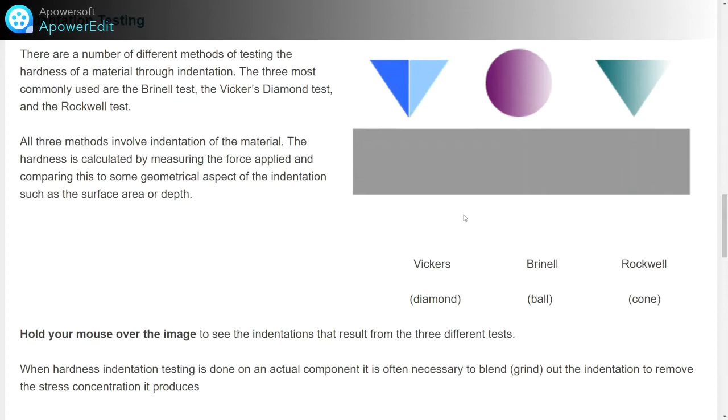Poldi hardness testing. So we'll see the Poldi hardness testing equipment. The aim of this Poldi hardness testing is to check the Brinell hardness number. So this is the body of the Poldi hardness tester, and it has this ball indenter with a 10 mm diameter. So we'll keep this here.

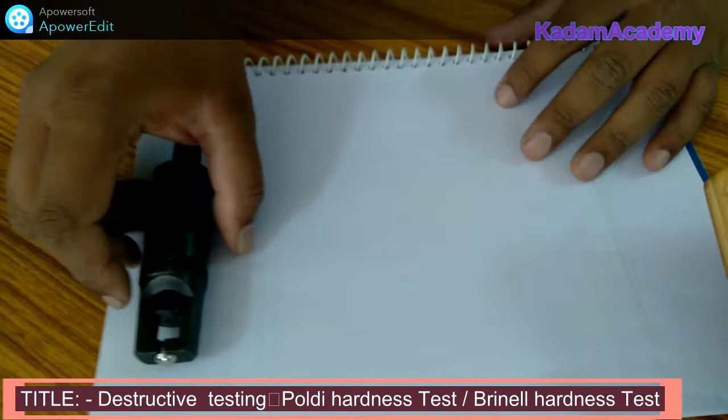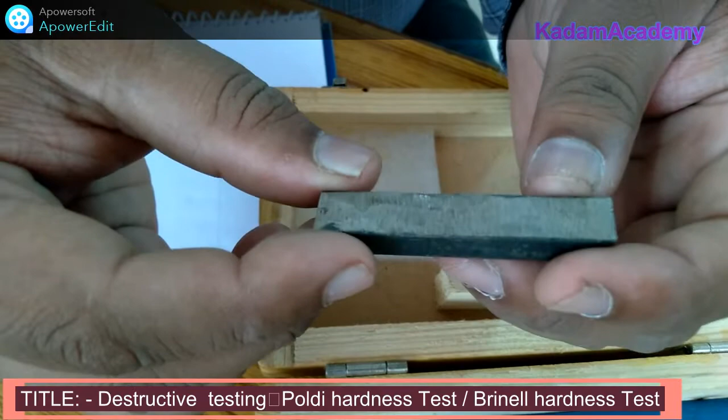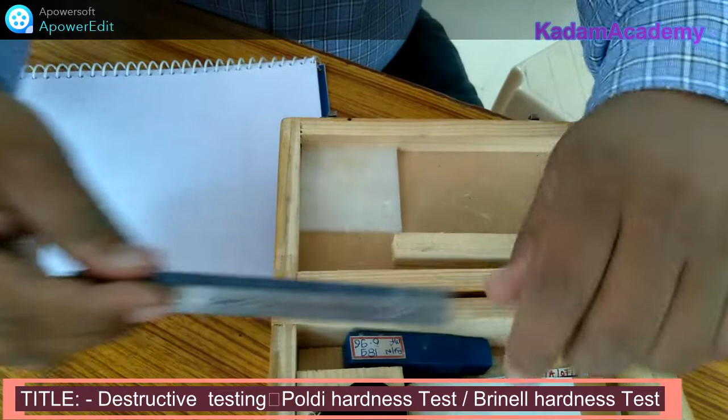Then we are going to check the Poldi hardness on this mild steel specimen. By using this Poldi hardness tester we are going to check the Brinell hardness number. So this is the mild steel specimen. Next, a standard bar of known hardness is required. Its hardness is about 189 BHN. So we know the hardness of the standard bar, and we are going to check the hardness of this mild steel specimen.

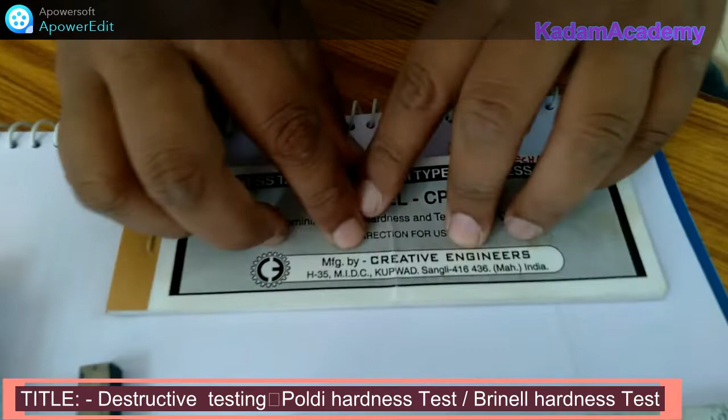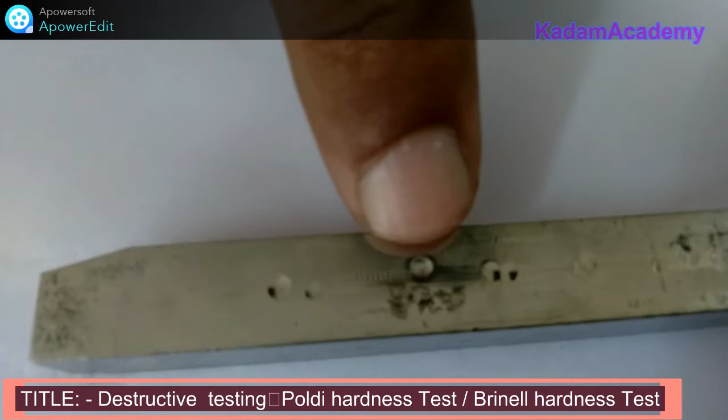Next, the chart is provided to you to check the diameters. You can observe here the earlier indentations on the standard bar. You can measure the diameter of these earlier indentations using this eyepiece. So you can put the eyepiece and measure this indentation here.

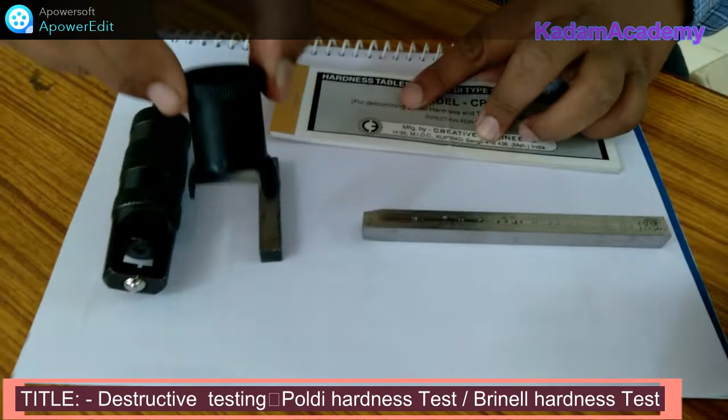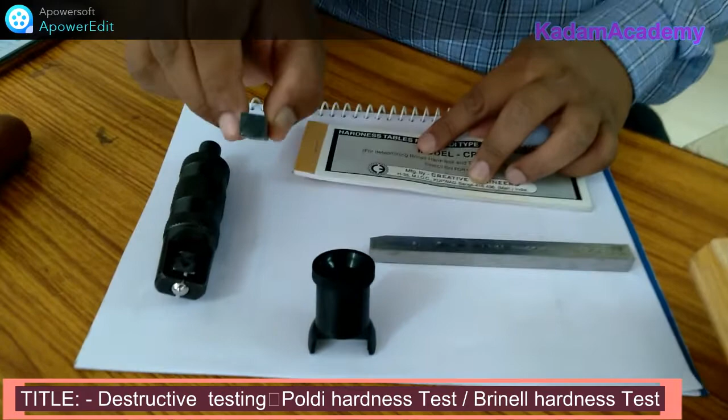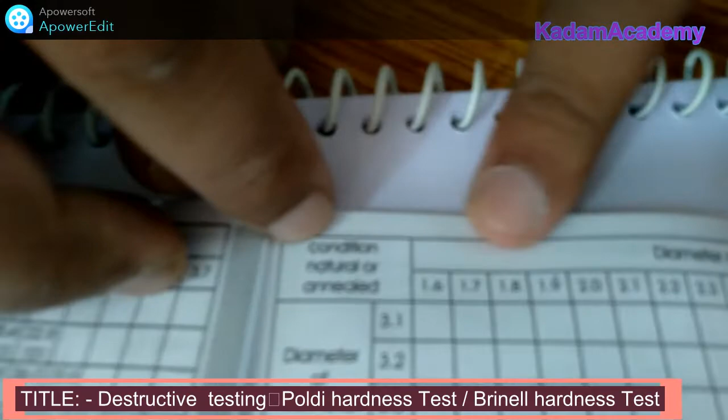Similarly, you measure the indentation by putting this eyepiece on the specimen, and after that you will have two different readings, one diameter reading of this mild steel specimen and one diameter reading of this standard bar. And you can observe in the chart that one diameter is on the X side and one diameter is on the Y side. So from that you can easily pick the values of BHN.

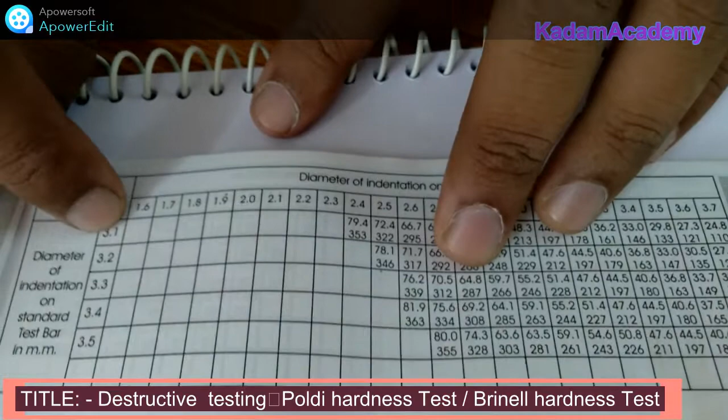The principle of working of this Poldi hardness test is similar to that of Brinell hardness testing. We'll make the impressions on this mild steel specimen as well as on this standard bar. So let us put this standard bar inside this section. So in this section we are putting the standard bar. So we have adjusted the standard bar here.

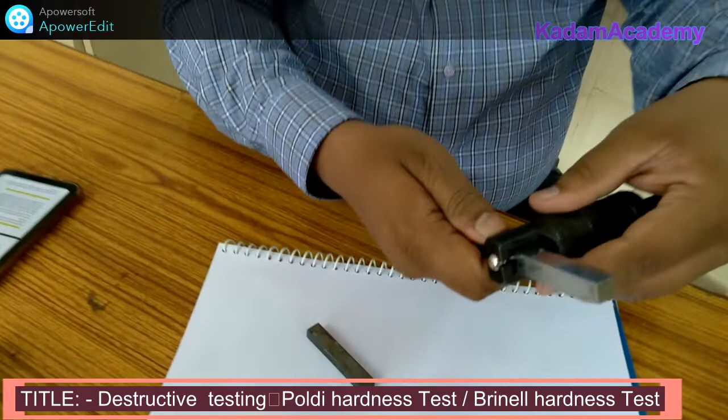We'll keep this arrangement in the left hand and put this specimen here, and then we'll put this left hand arrangement onto this specimen, and by using this hammer we'll make a blow on the top of this plunger, so that two diameter impressions will be made. One impression will be made on this standard bar and one impression will be made on this specimen. So let us take the reading.

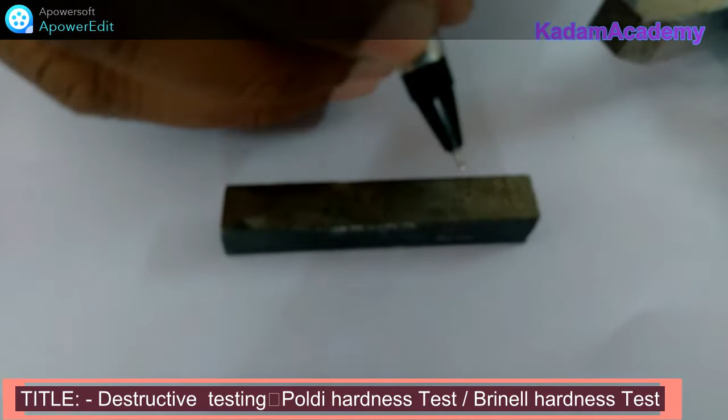So I am putting this arrangement onto this specimen, holding it like this in the left hand, and by using the hammer, let us strike the top of the plunger to make the impressions. Now you can see the impression is made here on this specimen. So you can observe the impression here. Inside this circle I marked, there is an impression.

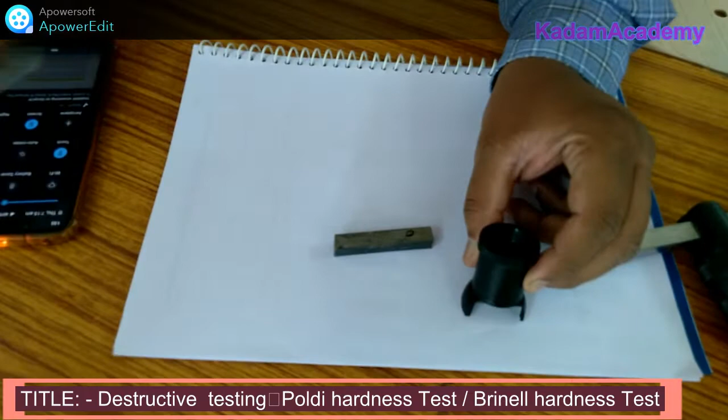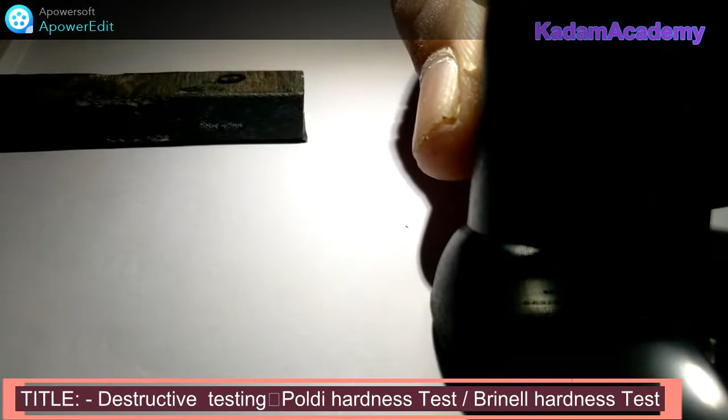Now by using this eyepiece, we'll check its diameter. So we'll measure the impression on this specimen. First we'll see the details of this eyepiece. This eyepiece has a scale here. Its least count is 0.1 mm. So you can see the scale now. It has 0 to 10, and each division counts 0.1 mm.

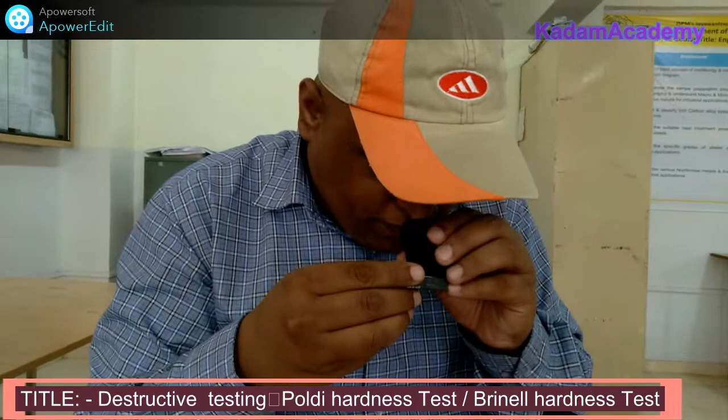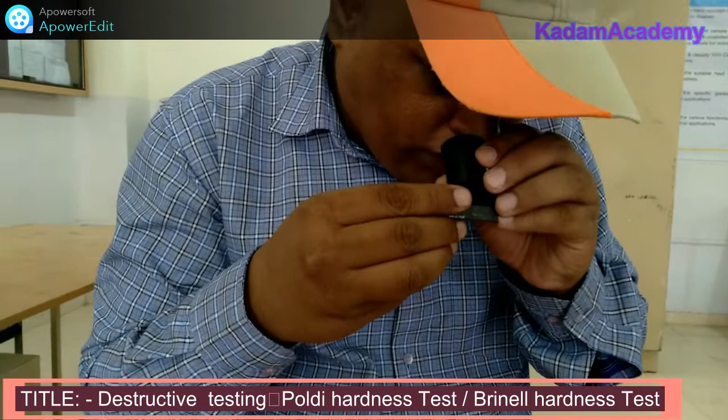Now I am taking the reading of this impression on the specimen by using the eyepiece. We will keep this eyepiece here and adjust the 0 point at one end. I am seeing here the diameter of that impression, and a total of 10 divisions are occupied by it. So the diameter is 10 divisions, and one division is 0.1 mm, so 0.1 into 10, that is 1 mm. Now we will measure the impression on the standard bar as well using this eyepiece.

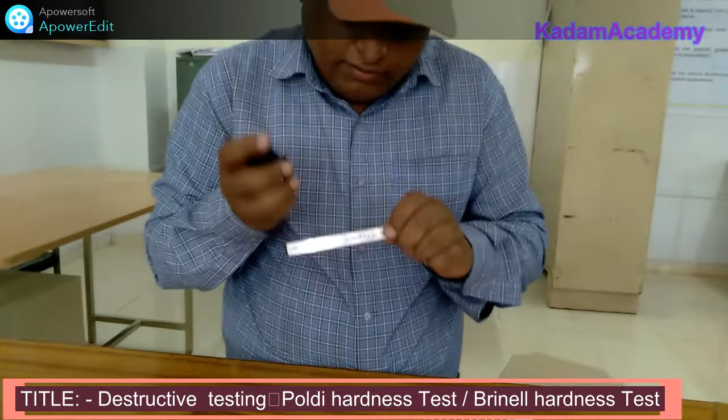Let us mark this impression. So this is the impression on the standard bar you are observing. By using this eyepiece, I am going to check the diameter of the impression on the standard bar. Now, adjusting the 0 to one side of this impression. This impression occupies almost 15 divisions. So 15 into least count 0.1 mm, it is about 1.5 mm. So the diameter of impression on this standard bar is 1.5 mm.

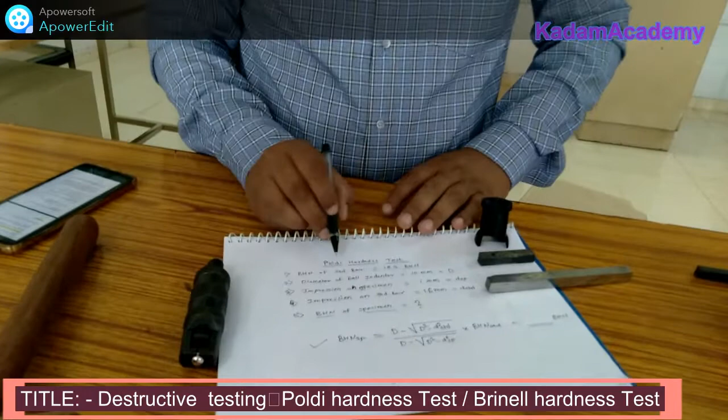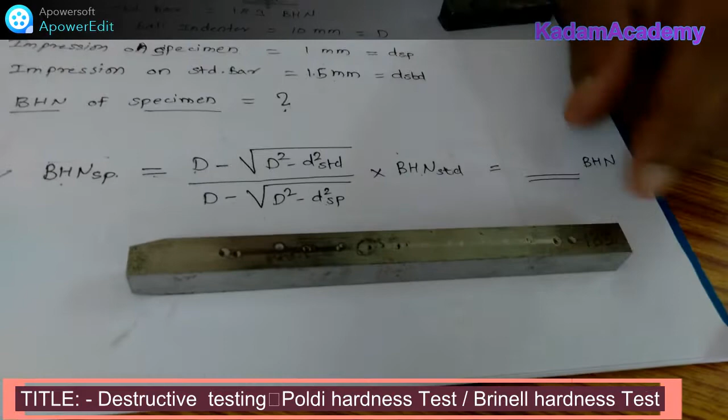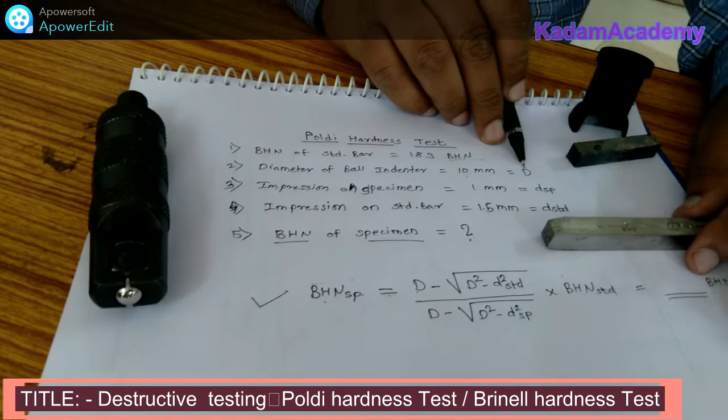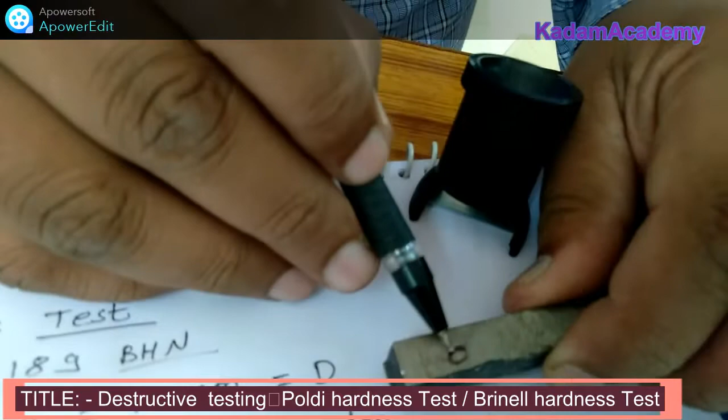Now we have taken the readings for this Poldi hardness test. The BHN of the standard bar is 189 BHN, as shown on the standard bar. The ball indenter is of known diameter, 10 mm, and its symbol is capital D. The impression on the specimen, measured using this eyepiece, is 1 mm, and the impression on the standard bar, d standard, is about 1.5 mm.

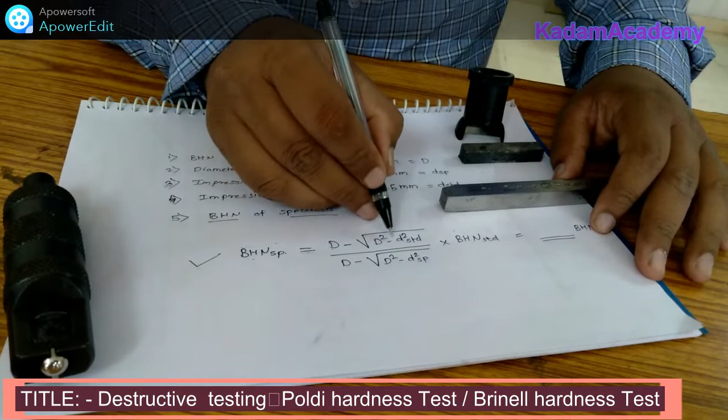Now we have to put all these values in the formula we already studied in unit number 2 under Brinell hardness testing. The Brinell hardness number of the specimen is equal to [D minus root(D² minus d_standard²)] divided by [D minus root(D² minus d_specimen²)] into BHN of standard.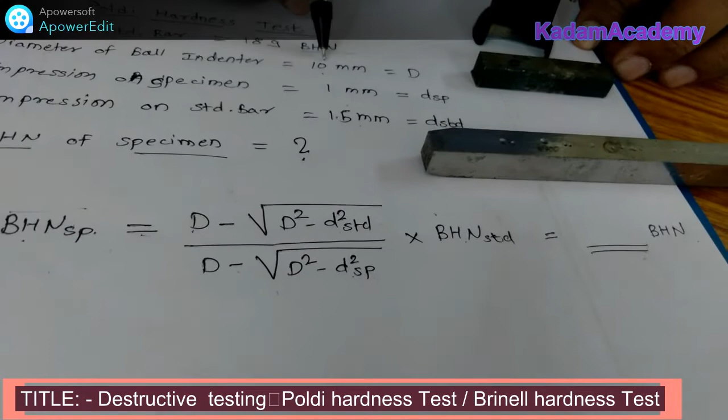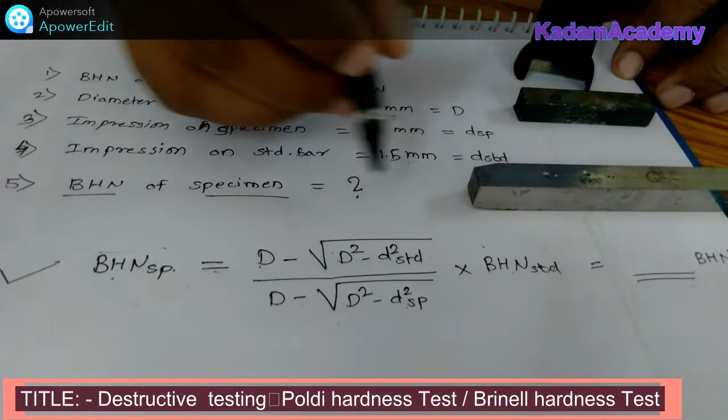Capital D is known, that is 10 mm. d standard is 1.5 mm. d specimen is 1 mm. And BHN of the standard bar is 189 BHN. So by putting in all these values, you can find the BHN of this specimen, and you will write the final reading here.

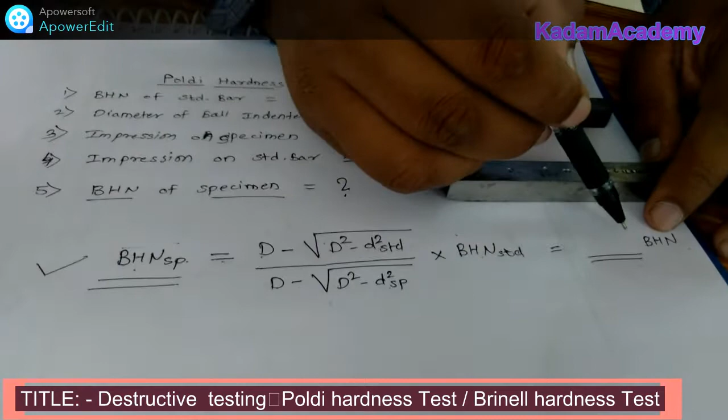So I conclude that Poldi hardness testing is used where portability of the specimen is not possible. You can take this plunger to any steel material, just hammer it, and observe the reading. You can also take readings over a range of hardnesses. It requires only one formula, so it is a fast process, and it does not require a skilled operator. The main condition is that the hammer blow differs between people, so we need to take care of the exact blow of the hammer.